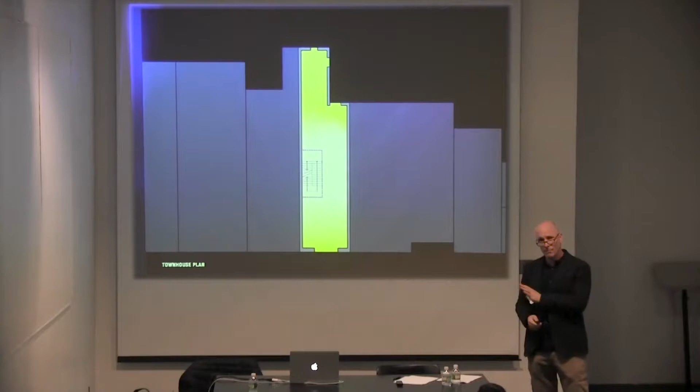So we looked at the project as a way to question this typology. How can we look at something so familiar and make it seem unfamiliar, and therefore slightly more beautiful as a result? We accepted the plan typology of a townhouse—these are the new plans: stair and elevator in the center, generous spaces up front, generous spaces in the back. Maybe we'll come back to this plan in a second.

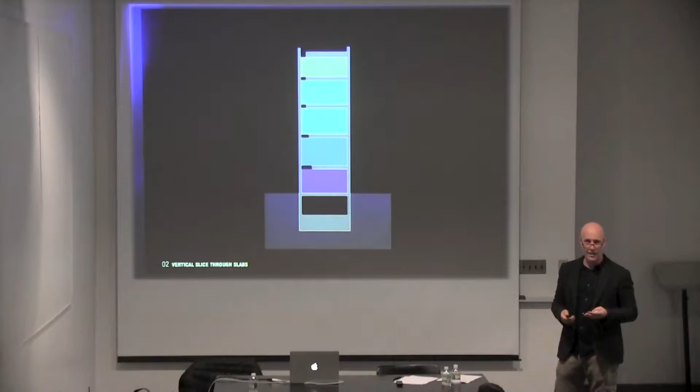What we thought we could question more is the section of the townhouse—this idea of stratification, like a pancake structure where purple has no idea what blue is doing, who has no idea what green is doing. We thought, how can we slightly mess with that relationship? Only slightly, because there's very little footprint to work with—you can't tear out great portions. There's a balance between the usable real estate we need and the idea of making an architectural idea out of this building.

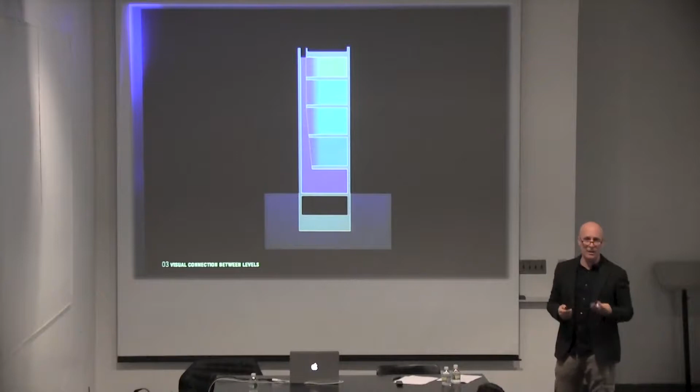We thought by doing that we could create a set of relationships that just aren't there otherwise. In the section, it's a matter of, in a kind of Gordon Matta-Clark way, slicing through these floor plates to make a space that's not even occupiable, but one that sets up relationships that couldn't exist otherwise. In the long section, these floors are all pulled away from the existing party wall, and in the transverse section, that becomes a long, narrow space that the stair also participates in.

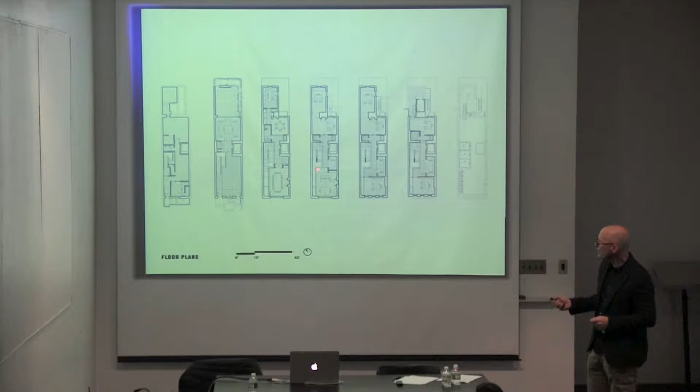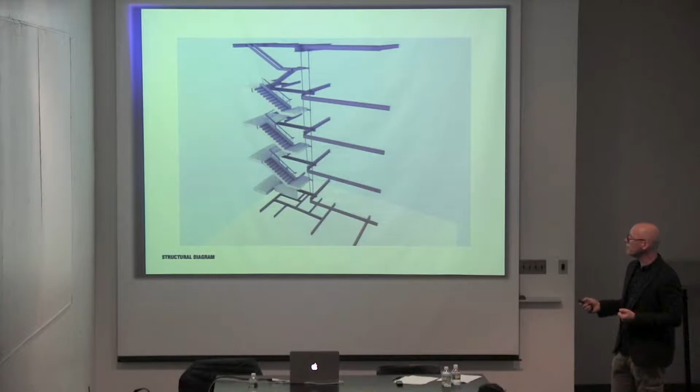Let me go back to the plans to show that cut that's been made—it envelops the stair and this narrow sliver. Structurally, pulling those floors away from the wall meant they needed to be supported otherwise. Rather than have a column and lumber structure bringing them down to the floor, we wanted to sense that liberation, so we realized we could hang those floors from the roof. We established a new structural frame where the roof beam became the means to pick up that corner at each floor, liberating the way it connects to the ground level.

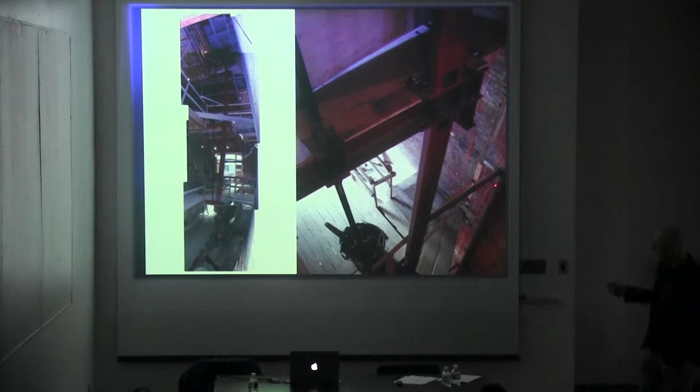You can see the full-blown construction of that hanging. These members are both in tension—this member ended up becoming more than just a rod, because once we liberated the floors from the wall, the wall was no longer supported. So this piece had to take the compression of bracing that wall back. It's in tension, hanging the floor below, but also in compression, bracing the brick wall. Here is that top beam that everything is hanging from.

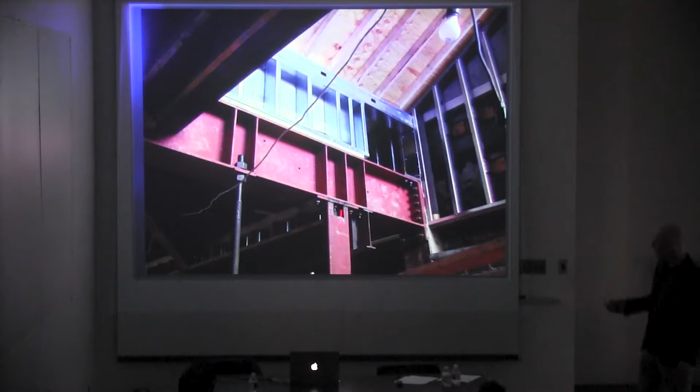And then you see, not very clearly here, but this is that space running through the building, and it ends up looking like this.

This is the view immediately upon entry into the space, where you open the front door and you're immediately given the full dimension of the building, both vertically—you can see all the way up to the sky—and horizontally. We blew out the entire first floor of the building, which I'll show you a little bit later on. So you're immediately in a place where you understand where you are in the world.

I think that may be a trope we find ourselves constantly returning to: this idea of how do you orient the individual within the building, and how are you orienting the building within the world? By making these moves, you become aware of the larger world outside the building, as much as you become aware of where you are within that building.

You can see that space up at the top. At the very top, it's very narrow—just 2 feet wide. It's just enough to get light down into the building. In fact, this rail that hangs here has a loop in it that can run along that track, which is for somebody to rappel down through to clean the glass or paint the wall whenever necessary.

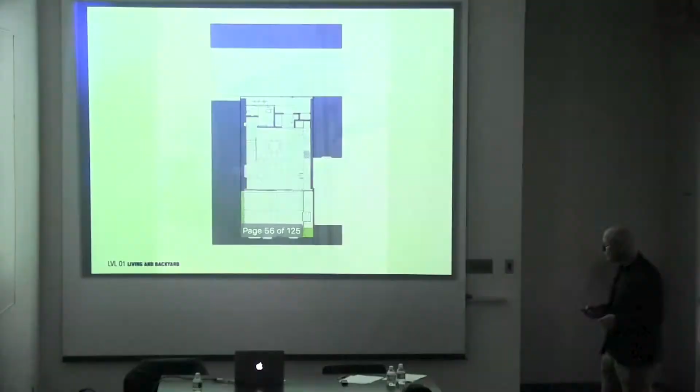The way we looked at that: this plan shows Charles Lane, the existing building on one side, an existing similar carriage house on the other side, and then the townhouse, and here's the rear yard. We thought that by creating a very, very narrow sliver of real estate between the alley and the front door, you could begin to generate the same ideas of domesticity as anything else we're accustomed to.

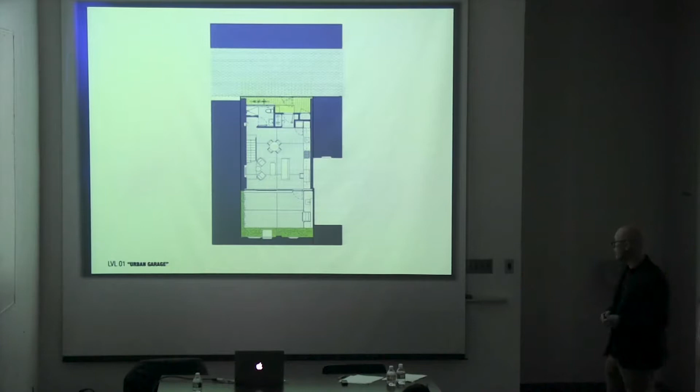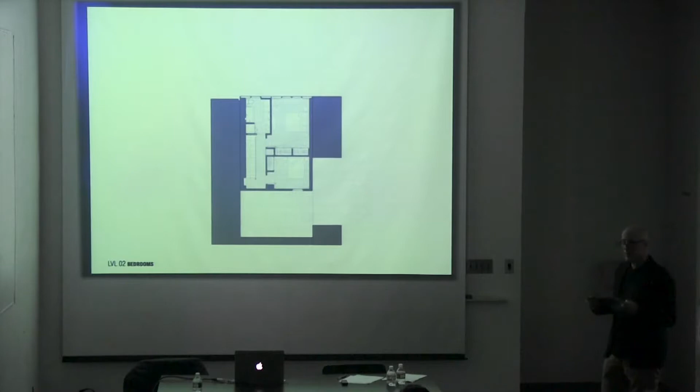Just to show you the upper level — the bedrooms, on the top level, the stair — again, how do you fit all of the elements of domesticity into a footprint this size? Top is a roof.

You can see this tiny, tiny little building vying for attention next to the Meier Towers. This is the Asymptote building on Perry Street, which started construction during our construction of our client's townhouse.

I think what's also interesting is in a project like this, again another infill project, the entire identity of the building is really bound up in one single surface, that facade. So for better or worse, that's the means through which you tell the story of the building. We pretty quickly had an impulse for what we wanted that to be, which was this idea of creating a screen between the street and the interior, but also creating a very clear taut face to the building above.

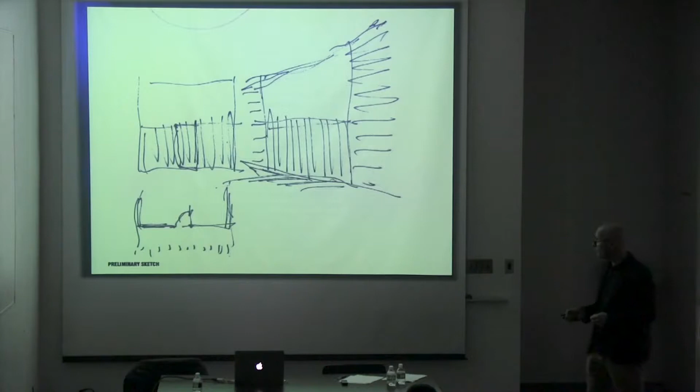After the process we all go through, that elevation developed into this, which looks like this - again a space where that lower level is a kind of indoor, outside space. In this case, the gate is open. This is actually - I'll show you where it's closed.

The very taut glass facade stretches over the length of the facade above as a way to maybe not over-articulate. Because it's such a small building, we wanted there to be larger gestures rather than get fussy with the space. So the spaces define themselves within the space of that glass. Here you see with the gate closed, that becomes a very uniform relationship with the street.

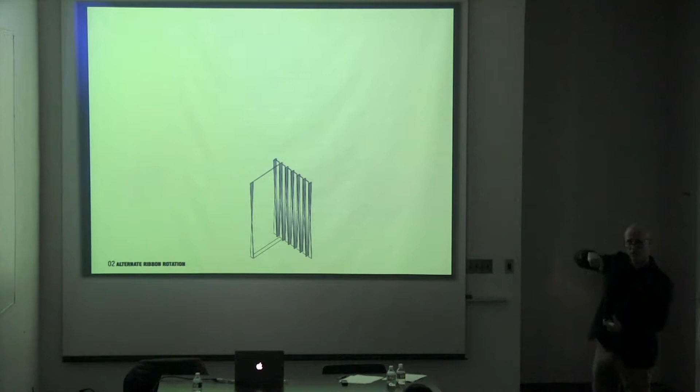That screen was developed by imagining the idea of a blade of steel that gets twisted 90 degrees from one end to the other, and then alternating the orientation of those one after the other to create what you see here. And that's the interior of that space.

Really everything is on this ground level. This is kitchen, this is living room, this is dining room, this is whatever else goes on in the house. The opposite view, you see the kitchen, and again just trying to take advantage here - you're literally in between the inside and the outside. These windows open, stretching the idea of the kitchen out into the rear yard to appropriate as much space as one could, given the terms you're operating under.

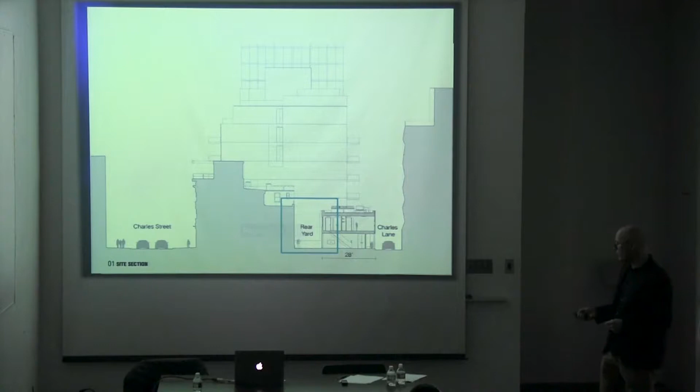You can see the windows on this rear yard side are actually quite low. The reason for that is, again, because the client - or basically these people, the landlord - lives in this building. You can see the relationship between your landlord and yourself is that very tiny, short space. So what we wanted to do is create conditions where here you still felt a sense of extension of the building and a sense of ownership of that space beyond, without staring at the landlord in the face.

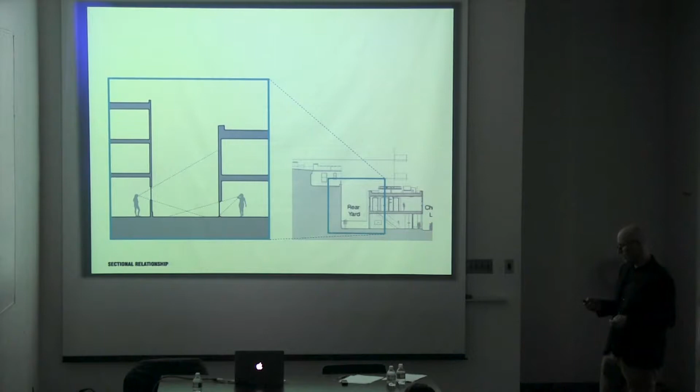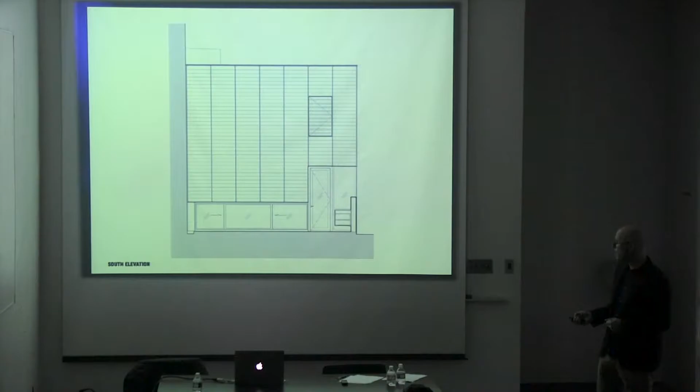And then this becomes a kind of tableau looking from the landlord side. Just now I'm realizing that we gave...

So the last project is a home that maybe ends up being something more than just a home. This is a project we completed from the ground up, prior to which was a completely undeveloped stretch of land out in the east end of Long Island.

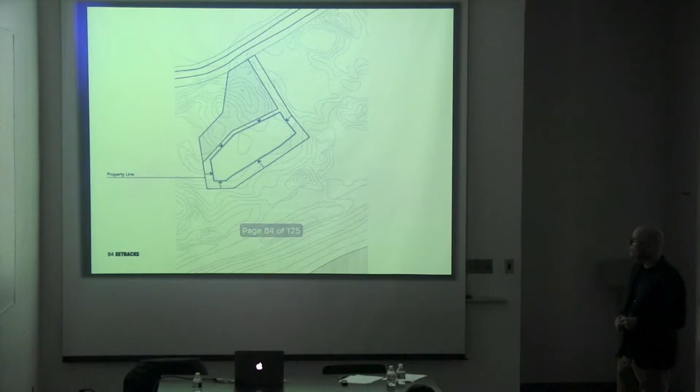Let me explain. Here's that site again, with all its topographical naturalness and infinite possibility. Here it is with the kind of political construct of the property line. Within that property line is also a scenic easement, so the client owns that land but can't build on it. Add to that the setback lines off of the property lines, and that becomes the buildable envelope.

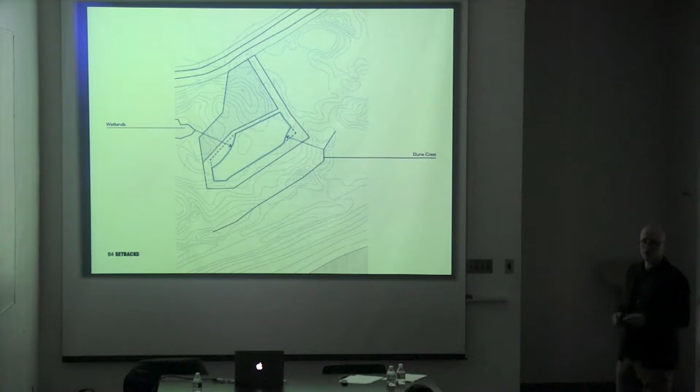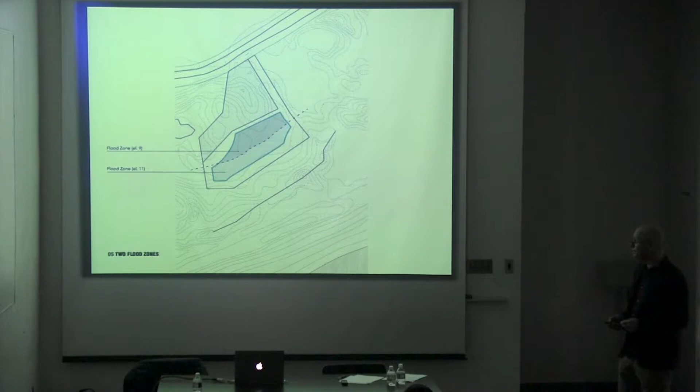Add to that the setbacks from natural conditions of the dune crest and the wetlands that you have to be a certain distance away from to demonstrate that you remain that way. Add to that there are two separate flood zones that establish the elevation at which you can build, which just by luck happen to run directly through the buildable area of the building. By that time, the building has basically designed itself. Maybe not quite, but you suddenly have a very different idea of what the site conditions are, what the kind of constraints are for building.

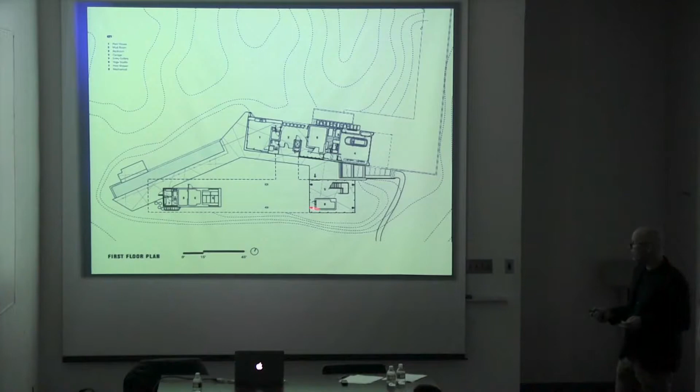At the ground level, what we tried to do here—this is a fairly large house, so it was very much in our minds how can we undo that, how can we make the impact of a very large house a fraction of what it would be otherwise. So we tried to tread very lightly at ground level, touching down only on the parts where we needed to.

Then at the upper level is where most of the action happens. The way we imagined this organization was not so much a striated idea of one bar being one program and one bar being another, but that the bridge becomes the social knuckle, so that two ends of the bars become social space, and the other ends become more private realm.

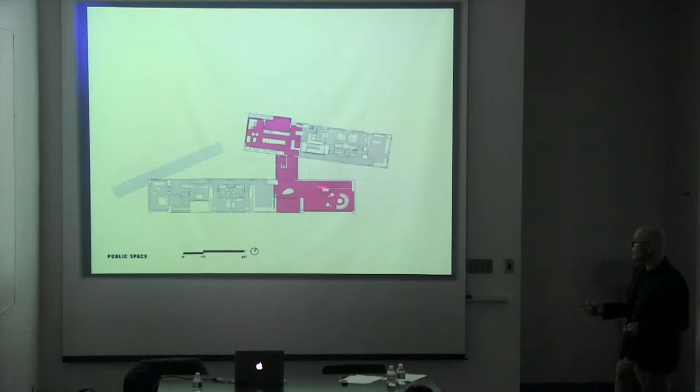So you can see here, kitchen, and that whole dining area happened on this end of the bar. There's a powder room here, and a living room and a play area or reading room happened here. Then in the other direction, it's an inverted C: master bedroom, four bedrooms, an office, guest bedrooms, and some service area.

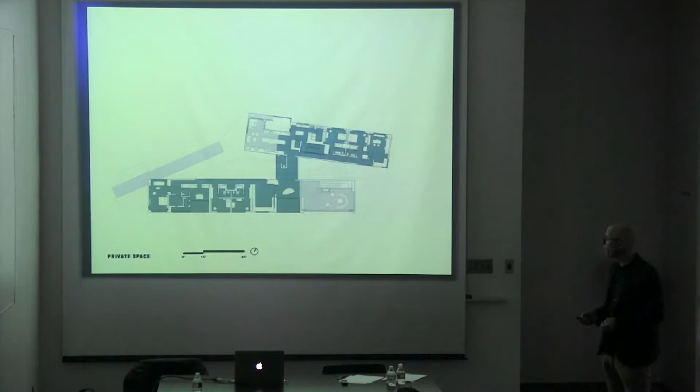One of the even larger constraints on the project was a vertical one. There's a limit on the height a building can be, and there are two different versions of that limit. You can be a certain height if you're a sloped roof building, and you can only be about 7 feet lower than that if you're a flat roof building.

Our client wanted to be as high as possible, because those dunes we were pulling ourselves away from were the only things between them and their view of the ocean. And if you put out this kind of money for a house on the ocean, you're going to see the damn ocean.

So you can imagine why that rule was developed, right? As a sloped roof house, only the apex of that slope is at that height, whereas if it was a flat roof house, you'd have a massive building up there.

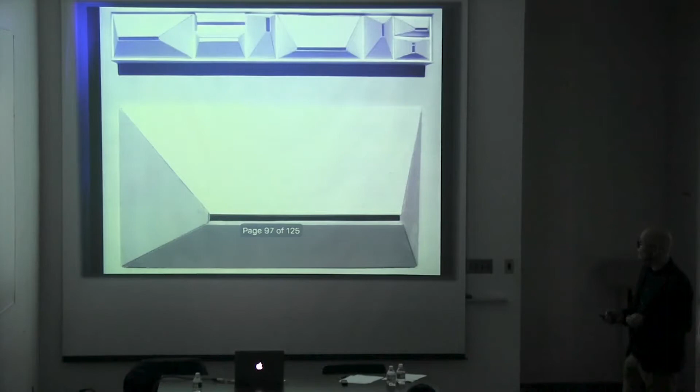We were able to convince the building department that if we made many, many slopes on a flat roof building, we actually complied with that language as it was written. So we went through different ways of trying to study how many slopes could exist on the structure and still comply with the rules.

And this is basically where we landed. We kind of started with the initial impulse of the sawtooth, went far afield studying other options, and ultimately came back to that idea of the sawtooth.

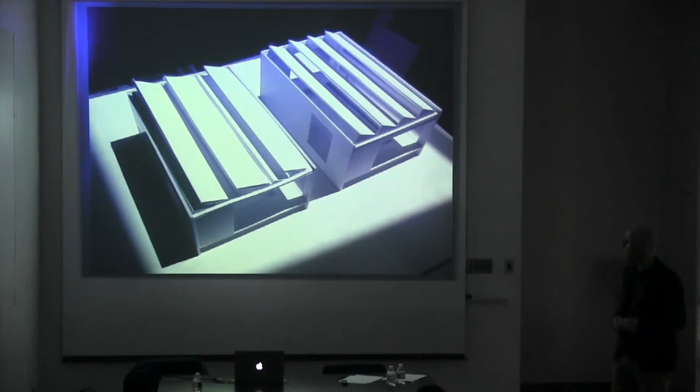It ended up doing a lot of things for us. One thing it does is allow a way of bringing light in—the roof suddenly becomes a kind of filter as opposed to just a way of insulating. It also creates a surface on which we can begin to harvest solar energy.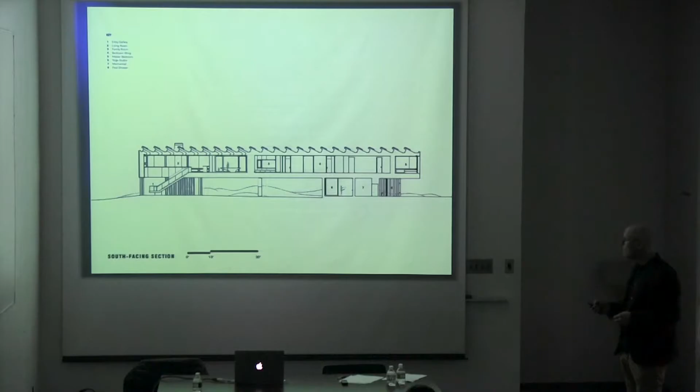So that's the ground view of the house. You begin to see how that sawtooth creates the identity of the place, and as I said, there were a lot of opportunities that started to present themselves. You can see how light comes through. But we were very conscious that we wanted the ceiling to be only about light, not about view—there was plenty to see horizontally in this building.

You could poke a hole anywhere in this building and suddenly you were a brilliant architect, because you'd made this incredible view within the space. So it wasn't about that. It was really about trying to find a way to make one aware of their relationship to a larger, extensive system.

Given the orientation of the flat portion of the roof, the house has the largest residential solar array of any residential structure in New York State. Add to that a geothermal ground loop system for heating the pool and domestic water, and a revegetation plan. We actually scraped the existing vegetation off the site, took it to a nursery, kept it propagated during the whole time of construction, and brought it back in place, replanted largely as it was—maybe a slightly better engineered version of itself, but still itself.

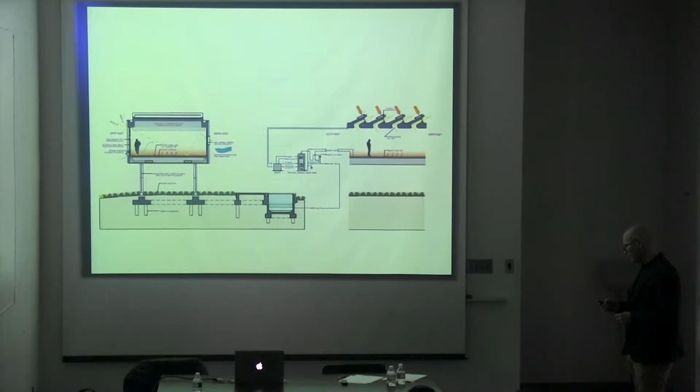So here you begin to see the effects, the possibilities and opportunities, of not only the character that gives the house, but then the qualities that it gives as well. Here's that detail. You begin to see how it affects the public spaces.

I'll go through and talk about the text there in a minute.

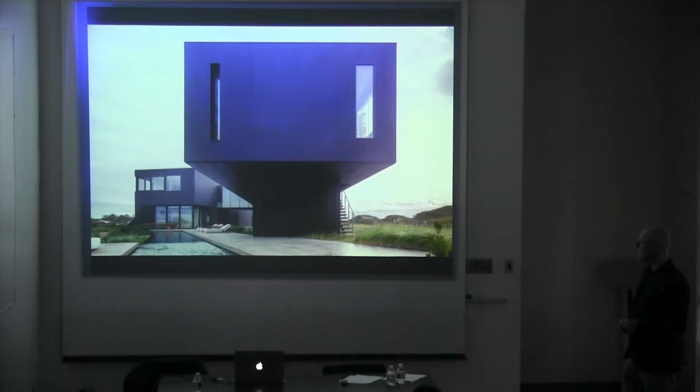Much of even the way you enter the house, we were conscious of this idea of wanting to feel like the house is letting itself down for you to enter up into it, rather than something orderly, in an effort to have this feel like it's treading slightly differently on this property.

This is here. It's actually interesting—in the original design of the place, this was an exterior space. It was meant to be an outdoor space, a kind of covered breezeway that left the building much more open to the elements than it is now.

These clients, in our relationship with them, started out as a guy with his girlfriend. They got married and had three children in the time between him first coming to us and us finishing construction of this house. The point of that story is simply that they ended up needing more room, so we ended up enclosing the space—just a way of telling you that a lot of architecture you see is the result of improvisation, even during its construction.

I'm going to end with this, because I think time is an element in architecture. So many of these presentations rely on the fact that images are our currency in architecture—we're inundated with imagery. I think too often we're lulled into the idea that the image is the architecture. But we can at least begin to think about the element of time in how we present projects, which I'll hopefully do here.

We had nothing to do with the making of this film—it was commissioned by the clients themselves, so it's a bit cheesy, but I think it does help give you a sense of time as an element of architecture.

What became most interesting about this was the degree to which reflection played a role—not really disorientation, but more a reorientation of place: nature, place, architecture, and the relationship between each other.